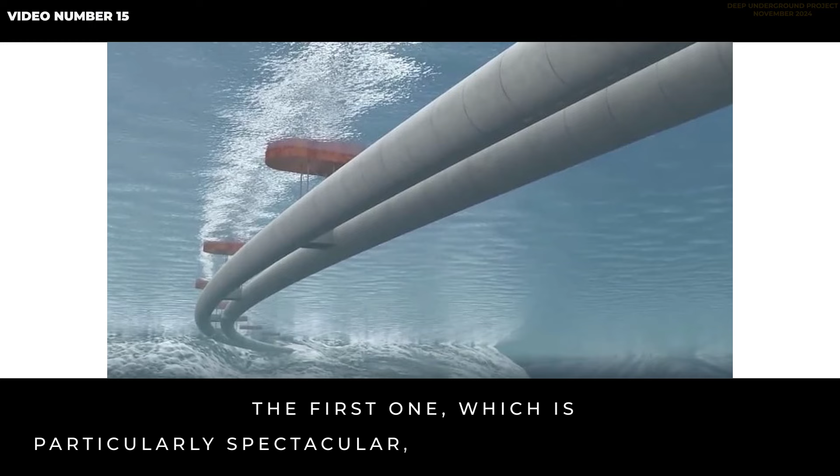To solve such problems, they invented several solutions. The first one, particularly spectacular, involves floating tunnels. There are also other ideas, including a ship tunnel to cross the hill between two fjords. But a single water tunnel could bring a car only over a single fjord, and a ship tunnel would bring a ship only to the next fjord through a single mountain. And since there are many fjords and many mountains, such projects don't make much sense.

The deep underground concept for traffic purposes is a system of shafts and tunnels which can be created at the same time by starting construction at multiple access points. So the general idea is to construct a system of tunnels and shafts along the hills, over the hills, and underwater to create a versatile transport system that can bring passengers quickly and safely from one location to another, including multiple fjords, islands, tops of mountains, and ports.

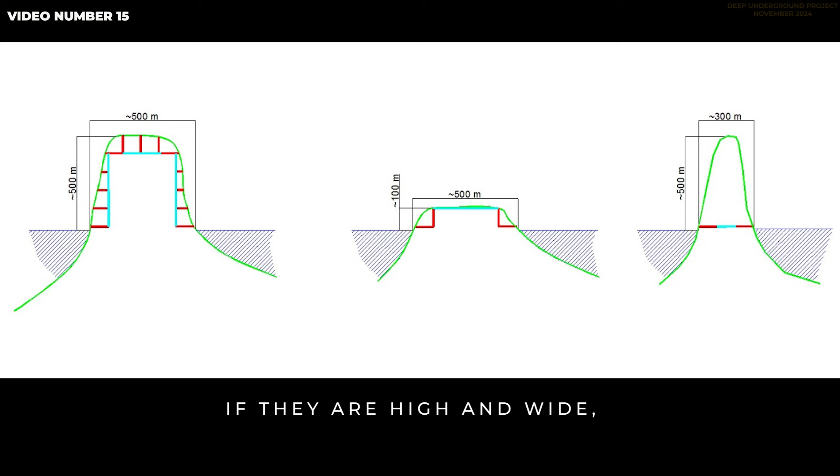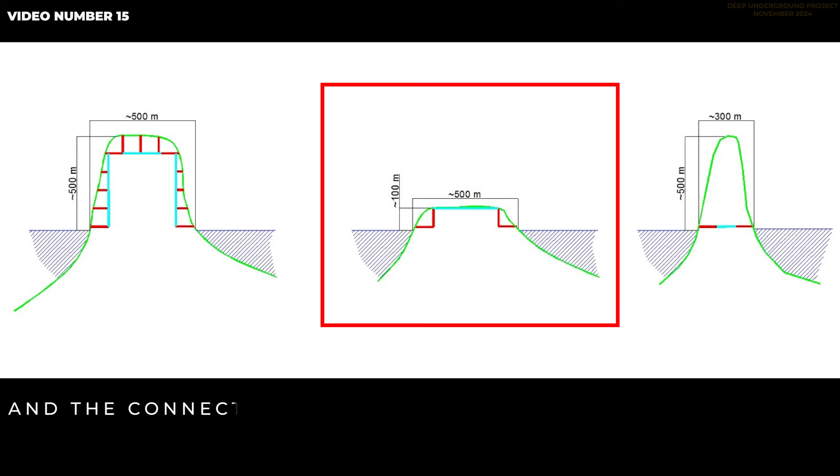Let's look at some examples. There are different kinds of hills between fjords. If they are high and wide, like the figure on the left, they would need several horizontal tunnels and several shafts. The middle figure shows a flat but wide hill. In this case, only 4 tunnels and shafts should be constructed, and the connection between them can be established via a surface or subsurface line at the top of the hill.

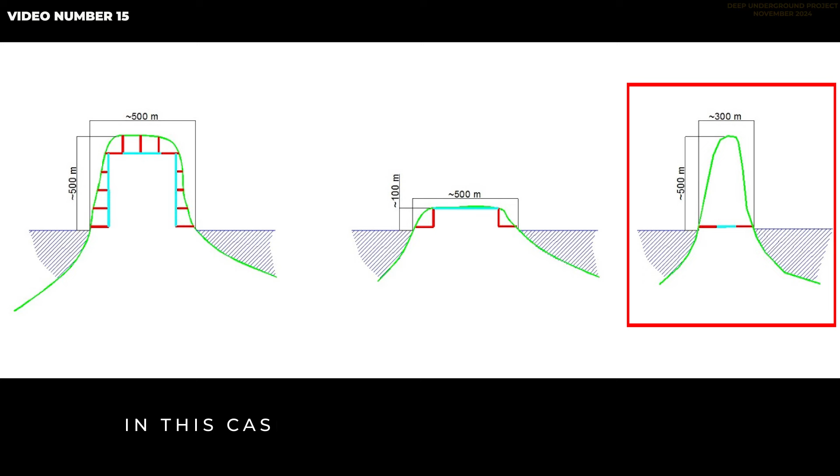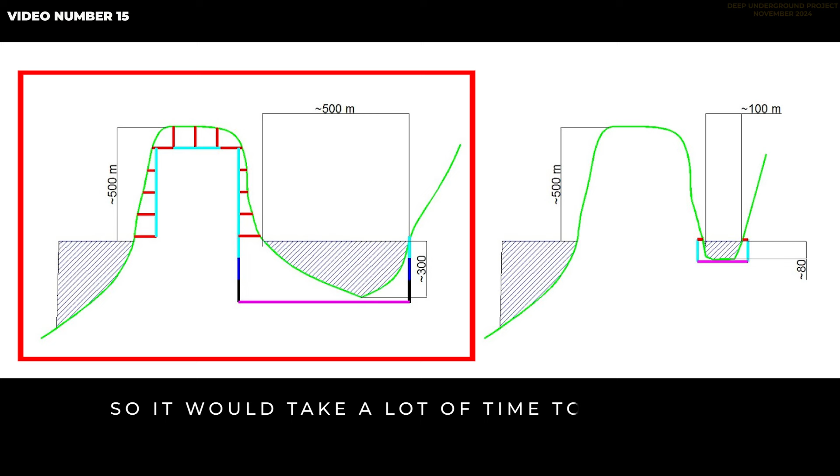The example on the right is another more favorable option, with much height but a relatively short distance between two fjords. In this case, a tunnel is the best option. To do the same underwater can be a bit tricky. The option to start excavation at several places simultaneously is not available in this case, so it would take a lot of time to excavate a tunnel under deep and wide sections.

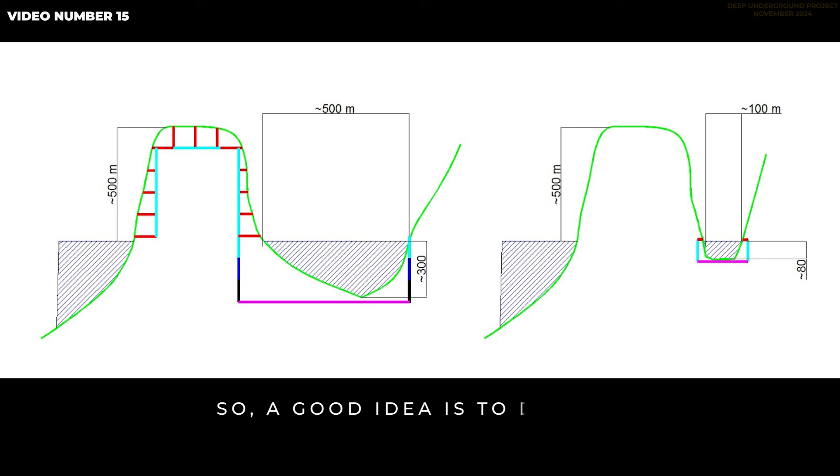A much better option is shown on the right, where it is possible to pick a shallow and thin part of the fjord and construct tunnels and shafts there. So a good idea is to design your new transport line along the fjords and try to find suitable places to bridge spaces over hills or underwater.

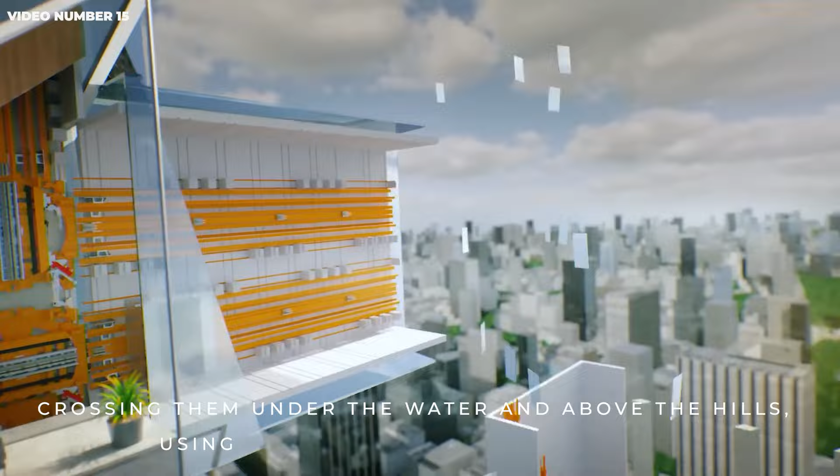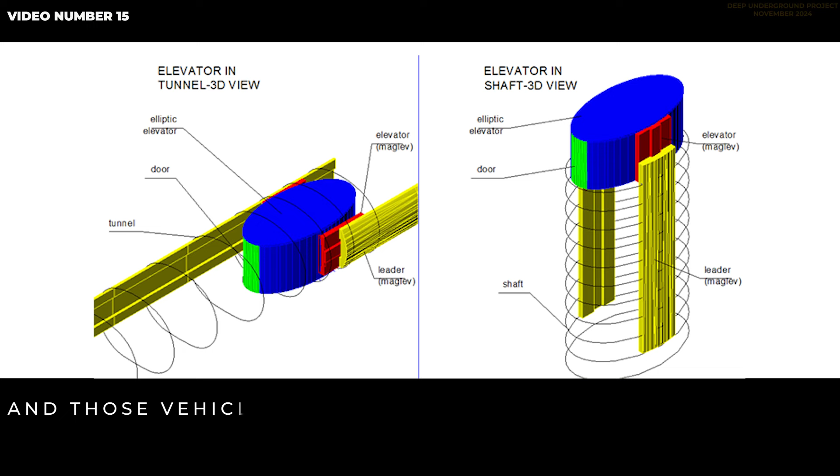It's obvious that current solutions trying to allow ships to float through the hills or cars to pass under the water are very expensive and technically challenging solutions with considerable negative impacts on the environment. If there is a place for such ideas, then it is not too strange to suggest another one, which is possibly as crazy and expensive as those two, using directional elevators for transport.

And this idea has its own advantages. No cars, ships, or lorries would be needed. It's a very versatile solution that can connect cities and points of interest underground in all directions. Nature will stay mostly intact since most of the routes are underground. The capacity of such transport can be very high because the elevators can follow each other within close distances, and they can evade each other as well.